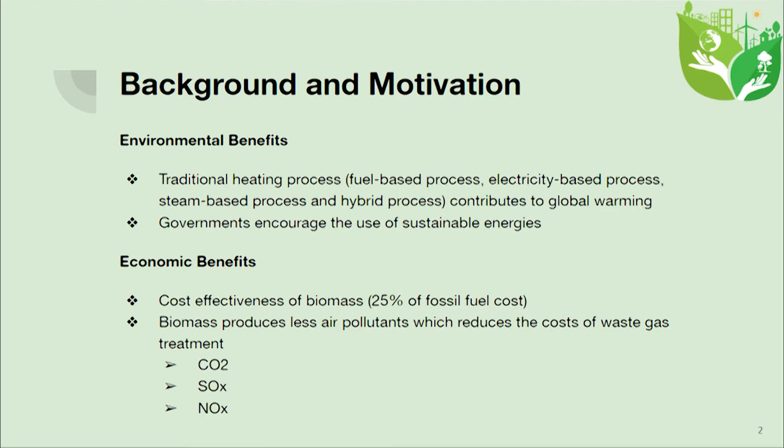Moreover, the amount of carbon dioxide saved in manufacturing industries in the US will be about 6,500 tons. Along with the carbon dioxide, large amounts of other pollutants such as sulfur oxides and nitrogen oxides are also in a much lower concentration. Even though biomass fuels create a lower concentration of pollutants than fossil fuels, there are still limitations that have been found in existing biomass gasification systems.

One of the current limitations is a high amount of tar and pyrolysis products being produced because pyrolysis gas does not pass the hearth zone. This requires extensive gas cleaning. Another limitation is the decreasing efficiency of biomass plants compared to fossil fuel plants due to the buildup of contaminants and deposits in the superheating tubes.

Contaminants such as potassium, chlorine, sulfur, and sodium, which are often contained in biomass fuels, can deposit on superheater tubes after being exposed to combustion exhaust gases. These deposits in their molten state can lead to accelerated corrosion of the superheater tubes, thus decreasing their efficiency faster. In order to reduce the corrosion of the superheater, the temperature of the process is reduced. However, doing this leads to a lower energy production efficiency.

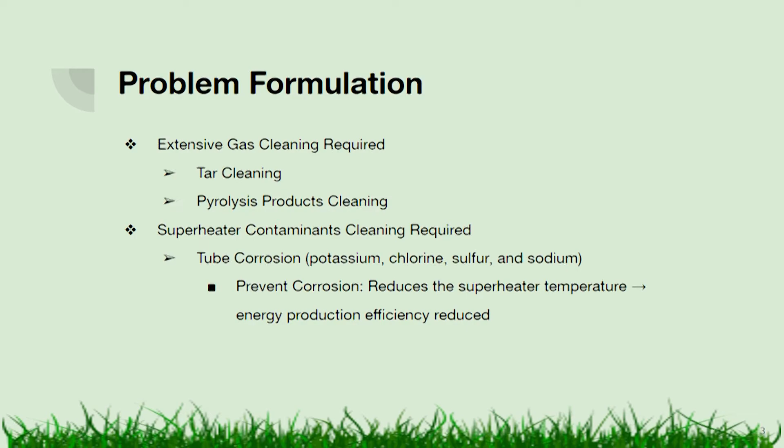In order to minimize these problems, approaches that aim to reduce the production of tar and pyrolysis products, as well as to reduce contaminant deposition, need to be implemented in the current biomass gasification systems. Our team will tackle the problem from 2 consecutive stages of biomass heating: the biomass gasification stage and the biomass boiler stage. In the first stage, where the biogas is generated, improving actions such as implementing biomass pretreatments and biofuel syngas purifications are considered in order to reduce solid and gaseous waste.

In the biofuel boiler stage, actions such as pre-coating the heat exchange tubes and removing corrosive components such as potassium chloride from biofuels are taken in order to prevent the buildup of the superheater contaminants. Optional boiler structural improvement methods also could be incorporated for optimization purposes.

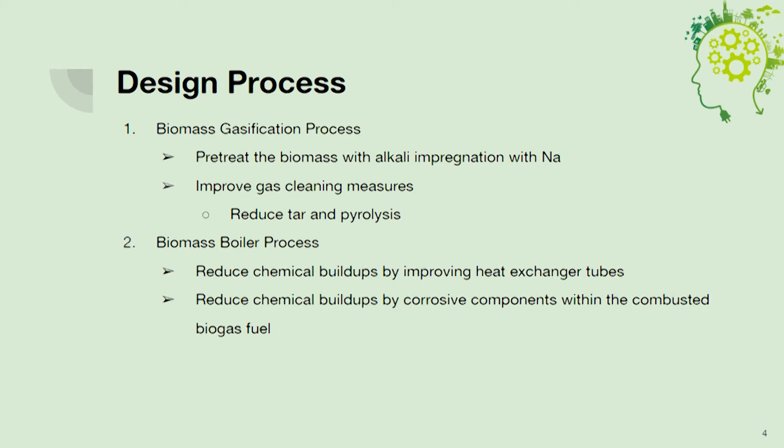The biomass gasification process, pressurized entrained flow biomass gasification, also known as PEBG, is a technology that is commonly used by the majority of manufacturers. This process generates gaseous fuel by heating wooden or agricultural biomass inside a gasifier. Although this large-scale gasification system can supply heat on a large scale, this process also requires a very high temperature environment, which often causes soot formation and ash accumulation.

The team suggests pretreating the biomass with alkali impregnation with sodium before being processed by the PEBG system. This process will increase the char gasification rate, improve tar decomposition, and decrease tar formation. The biomass pretreatment will increase the sulfur capture rate by 20 to 40% compared to the non-impregnated materials.

The product gas generated from the biomass gasification also needs to be further processed in order for effective utilization. Gas cleaning is a critical part of the system, which is applied in order to avoid corrosion, erosion, and environmental problems in the downstream equipment. The product gas mainly contains particulates, tar, alkali compounds, and nitrogen and sulfur containing compounds, which need to be removed before the product gas is used.

Cyclone separators are taken into account to be used to separate larger particulates above 5 micrometers in diameter at the initial cleaning stage. As well, wet scrubbers will be installed to remove particulates using liquid sprays on the gas stream. It can remove 95 to 99% of particles over 1 micrometer and 99% of particles over 2 micrometers.

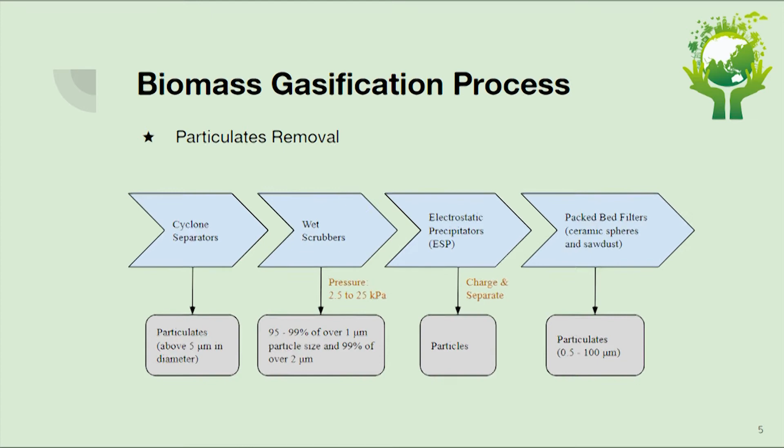As well, a simpler and cheaper filter is also considered to be installed to purify the gases. The filter will have 2 layers. The outer layer will be made out of zinc oxide, which is aimed to capture the remaining sulfur from the previous processes, and the inner layer is made out of carbon in order to absorb tars produced in the upstream steps.

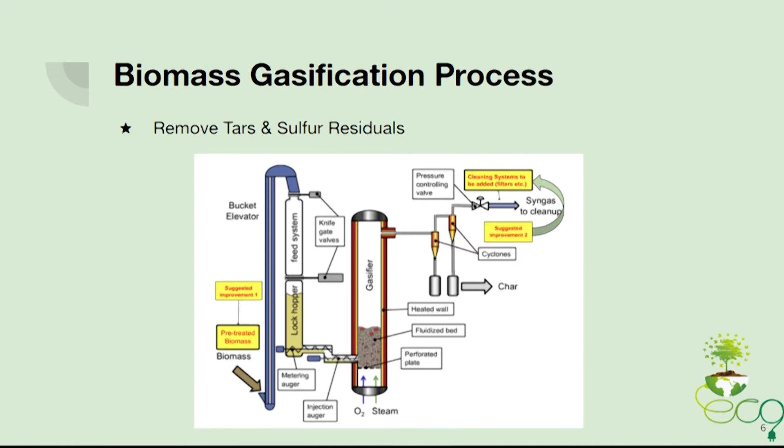In order to mitigate corrosion of the superheaters in the biomass gasification systems, modifications to the current system including using sulfur additives, optimizing boiler design, and optimizing the steam temperature are included. Most corrosive materials found in biofuels are the chlorides, such as potassium chloride.

Additives such as ammonium sulfate can remove chlorides from superheater deposits and reduce superheater corrosion rates by 50% by converting alkali chloride deposits to less corrosive alkali sulfate deposits.

Boiler modifications such as adding a radiant pass between the furnace and superheater, installing cooling tubes directly upstream of the superheater to trap chloride deposits, and adding a superheater insulation layer to increase the surface temperature above the dew point temperature of alkali chlorides can also be implemented to reduce corrosion.

As well, the steam temperature should be optimized so that the maximum temperature achieved with the lowest total energy and maintenance costs is sustainable. These modifications will require testing and optimization based on the properties of the boiler and will aim to optimize the boiler's lifetime and efficiency.

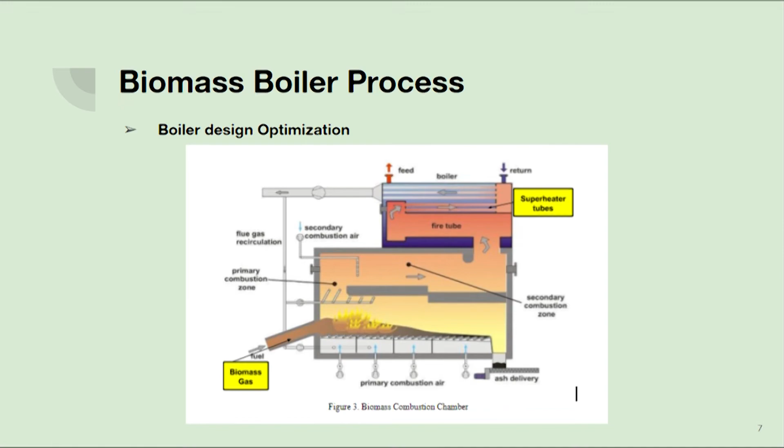Advanced manufacturing technology such as nanotechnology has also been introduced into preventing the corrosion due to its ability to enhance both mechanical and physical properties. There are 2 methods, which are top-down and bottom-up. Both methods aim to develop a nanocrystalline coating above the superheater tube. For the top-down approach, it aims to generate a nanostructured alloy along with the pre-existing material.

For example, the surface mechanical attrition treatment benefits from the milling ball impacts, which contributes to the grain refinement induced by plastic deformation. In this treatment process, plastic deformation occurs in the surface layer because of the strike from the multi-directional flying ball. The nanostructure is generated under a high strain rate. Also, the nanograined layer, which is made of pure zirconium, is relatively stable in a high-temperature environment.

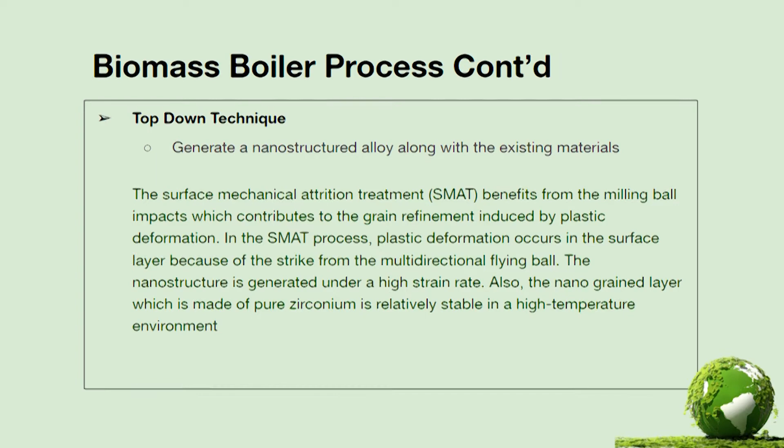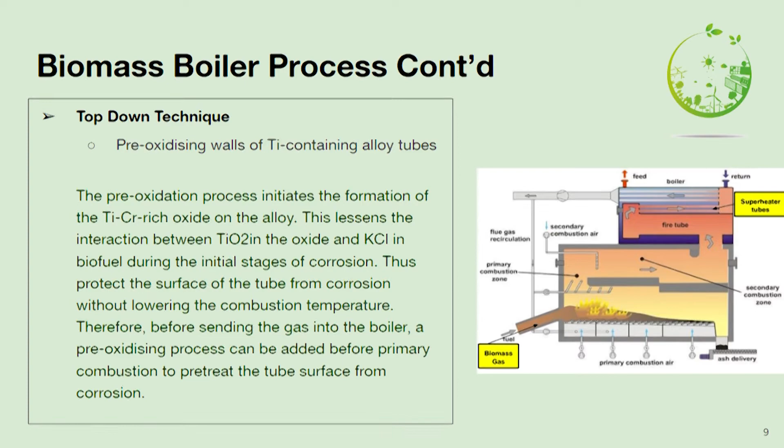Another approach to improving the biomass superheater is to pre-oxidize the walls of titanium-containing alloy tubes, which is also known as Nimonic 80A. This pre-oxidization process initiates the formation of the titanium-chromium-rich oxide on the alloy. This lessens the interaction between titanium dioxide in the oxide and potassium chloride in the biofuel during the initial stages of corrosion. This will thus protect the surface of the tube from corrosion without lowering the combustion temperature.

The bottom-up method places emphasis on the formation of nanocrystalline coatings from nanocrystalline powders, such as the HVOF process or spray-based processes. Furthermore, the coating can be formed through growing nanocrystalline layers directly on other layers.

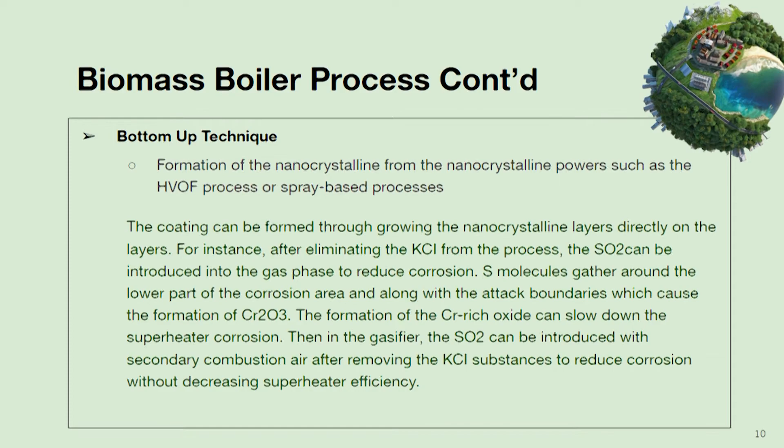For instance, after eliminating the potassium chloride from the process, the sulfur dioxide can be introduced into the gas phase to reduce corrosion. Sulfur molecules gather around the lowest part of the corrosion area and along the attack boundaries, which cause the formation of chromium oxides. The formation of chromium-rich oxides can slow down the superheater corrosion. Then, in the gasifier, the sulfur dioxide can be introduced with secondary combustion air after removing the potassium chloride substances in order to reduce the corrosion without decreasing the efficiency of the superheater.

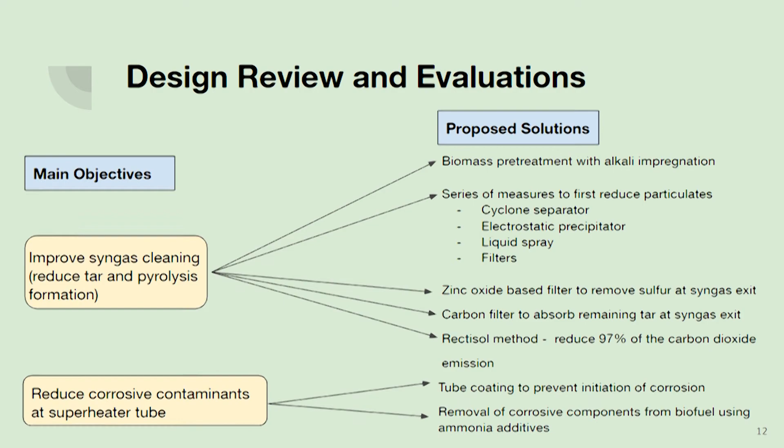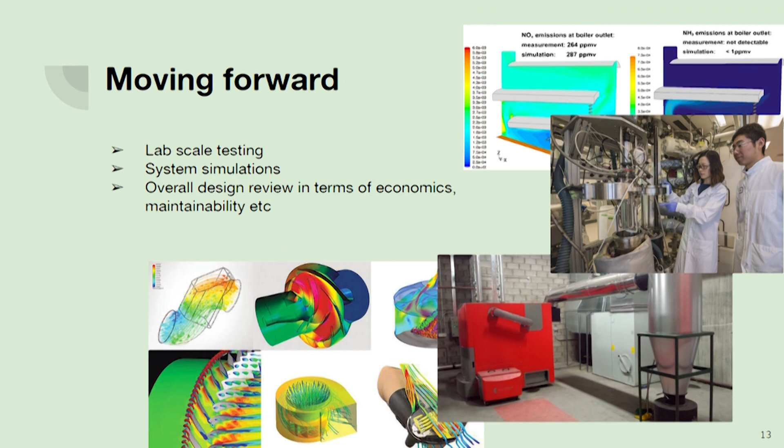Then, the selected improvement steps can be incorporated together and modeled as a complete system. The construction and evaluation of these steps would require extensive laboratory resources and use of computer-aided design and simulation tools. After optimizing the processes, an overall cost efficiency and design for environment maintainability analysis should be performed, where a final design stage could be reached.